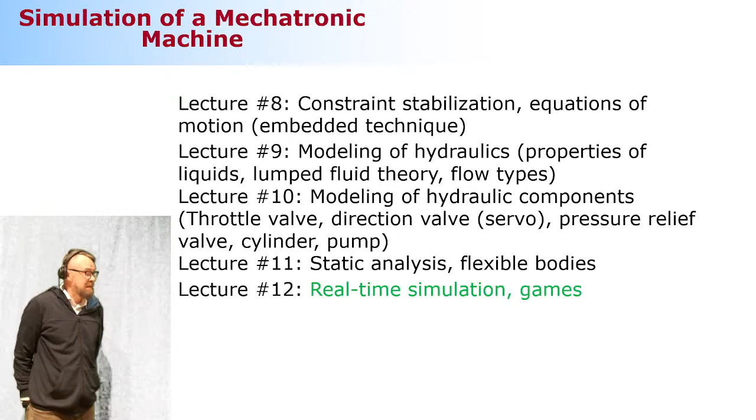All right, so with that, let's first look a little bit about what we discussed a week ago, and then I have a couple more slides about deformable bodies. I'm not planning to spend too much time on deformable bodies, but just short highlights about that subject matter, and we will get back to that.

I mean, those of you that will be assigned to this simulation laboratory course, we will discuss more about how we can combine different softwares together, like a finite element method software that is capable to model control schemes and so on and so forth. So that's going to be another course then.

But flexible bodies—remember that the need to model deformable bodies is because we would like to make more accurate models, a better representation of reality. And sometimes, particularly in hydraulically driven structures, they are somewhat slender and flexible structures. The flexibility is so significant that to make realistic predictions about reality, it needs to be accounted for. And there are several ways you can do it.

A week ago we discussed the method that is a very rough method, the lumped mass approach. There's actually an even simpler method than the lumped mass approach, and it has a really fancy name: it's called linear theory of elastodynamics. That is a method where we assume the body to be initially rigid.

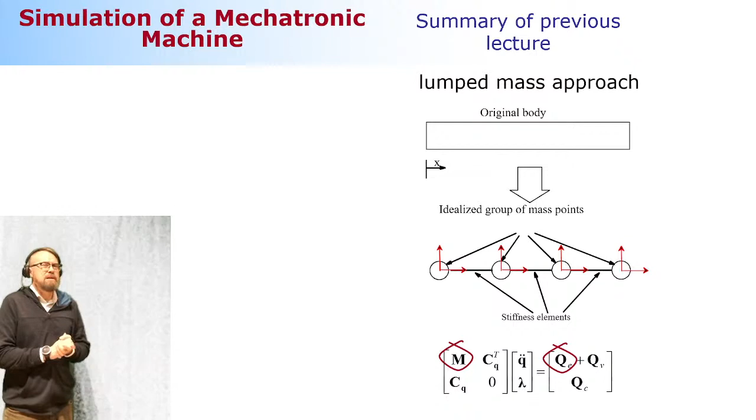And then we take a look at all the forces imposed on the body. Those forces are then used as a pre-processing or post-processing procedure to compute how much deformation those forces are capable of introducing. This deformation can be computed using a finite element approach, or just analytical equations that will be superimposed onto the rigid body motion. So that's a very coarse method and is not used heavily. At the moment it's not being used almost at all, because it's theoretically an incorrect way to do it, and that can lead to seriously incorrect responses.

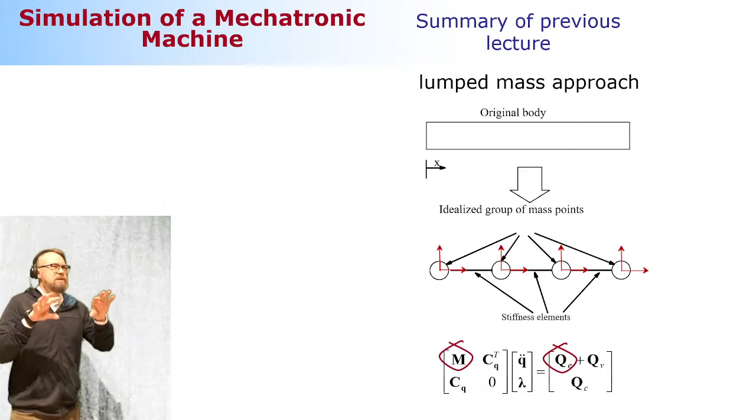So it's a risky business to use something like that. Anyways, the lumped mass approach is a simple approach where we take an original rigid body and divide it into a number of rigid bodies. What we do then is add spring elements between these rigid bodies such that there is a stiffness to each of the 6 degrees of freedom in the spatial case. And that's all that is needed, that's about it.

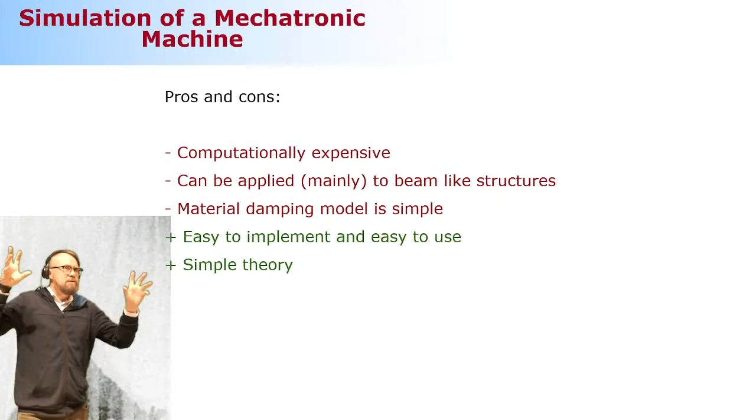Remember that situation where you have low frequencies and very high frequencies simultaneously. Integrators, the numerical time integration schemes, they can recognize the low frequencies, of course, but they recognize the high frequencies too, and they usually adapt themselves based on these high frequencies. And that slows down the computation very significantly.

And the method can be applied to beam-like structures. There are studies where this lumped mass approach is being used in plate-like structures too, but it becomes cumbersome to do so, not so straightforward anymore. And the material damping model is simple. I don't think that's a serious problem, but it's good to take into account. It's easy to implement, easy to use, because the theory is based on rigid bodies. And that's about it.

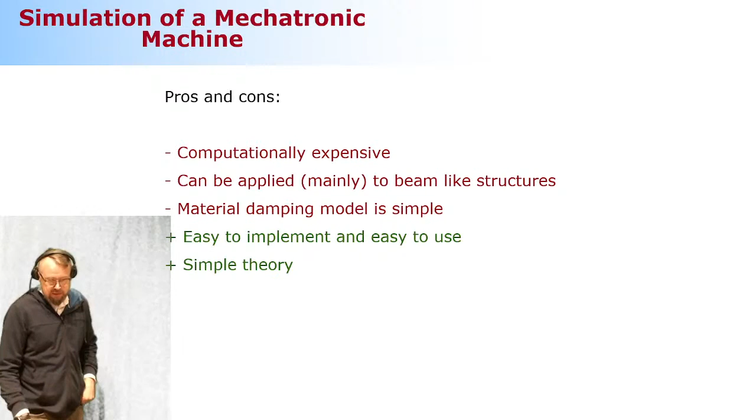Okay, then a short few words about the alternative, which is the currently dominating method to model flexibilities. It's a great method, but it's unable to describe very large deformation, because in this method the strain-displacement relationship, what we discussed a week ago, is assumed to be linear. In many cases that's okay, so it's not a big deal, but it's good to keep in mind that this is not capable of describing large deformation, like in the case of belts. It just cannot do it.

Okay, what is this method then? It is called the floating frame of reference formulation. Very lengthy, complicated name. What that means, essentially, is that we're going to use this body reference coordinate system you guys are familiar with, and we're going to introduce the finite element method with respect to this body reference coordinate system. That means the deformation computed based on the finite element method is not trying to describe the large translations and rotations that are already described by using this reference coordinate system, but small deformation with respect to the reference coordinate system. And this reference coordinate system is the one that is called the floating frame of reference.

The floating is a special case that every now and then you need to consider. It means that this reference coordinate system is traveling, translating and rotating, but it can be attached to the body in a way that is not attached the same way as in rigid bodies. Because in rigid bodies, there is no relative motion, whereas in flexible bodies there can be a little bit of relative motion due to the deformation. That's where the floating term is coming from.

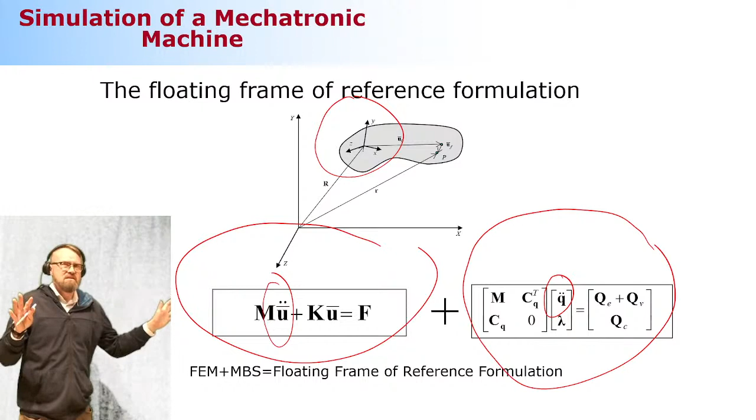There is, however, a big problem that we still need to address. The problem is such that if you think about the number of unknowns in multi-body system dynamics, in one spatial body we need 6 or 7 coordinates, let's say 6. Whereas in a finite element method, it's very common to see models that consist of 100,000 degrees of freedom, even 1 million degrees of freedom, meaning the number of nodes and nodal degrees of freedom is easily very high. So high that things are not matching well. Think about 100,000 versus 6. They are not in the same world, so they are not comparable.

So we need to do something to this finite element model. Something we can do for the finite element model is make it smaller. That's called modal reduction, or one way to do it is the modal reduction technique.

Let me just see what the comment is. So there's a complaint about my mic, that you don't see me or hear me well. Is it getting better? This is what I'm asking for online participants. Is it better? Okay, now better. Okay, very good. So I've got to keep it like this. Sound is okay, very good.

So I was about to say that we need to do something for that finite element model, and something we can do is reduce the size. This is a bit of a lengthy story and I'm going to cut corners, but basically what we do with this finite element model is take a look at the possible deformation, how the entire structure, this time the entire body, can deform. It can deform as many times as there are nodal degrees of freedom, meaning 100,000 times if you have that size of model.

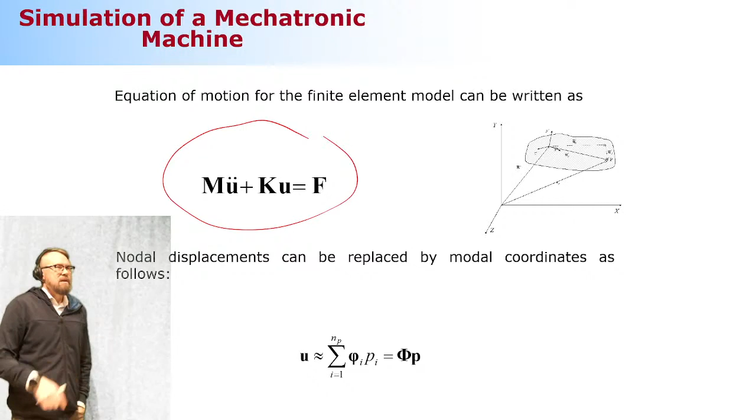And that's what makes it possible to use it as part of the multi-body system dynamics. So this is how it works then.

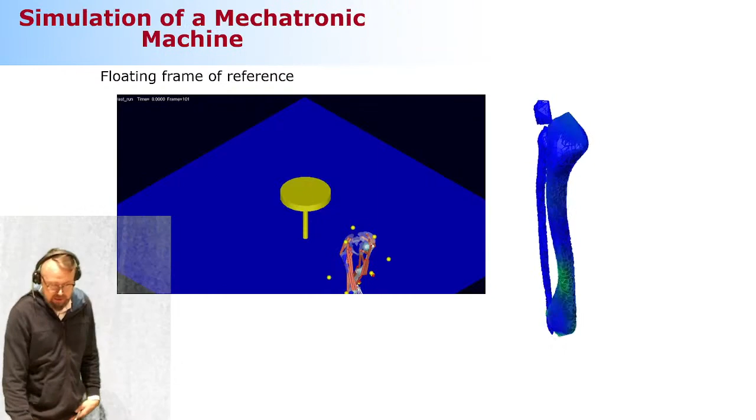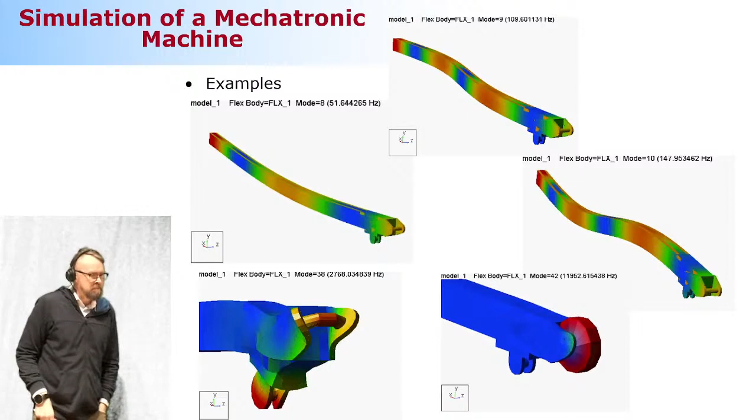Okay, so with that, I'm going to move on to real-time simulation and games, if there are no comments or questions.

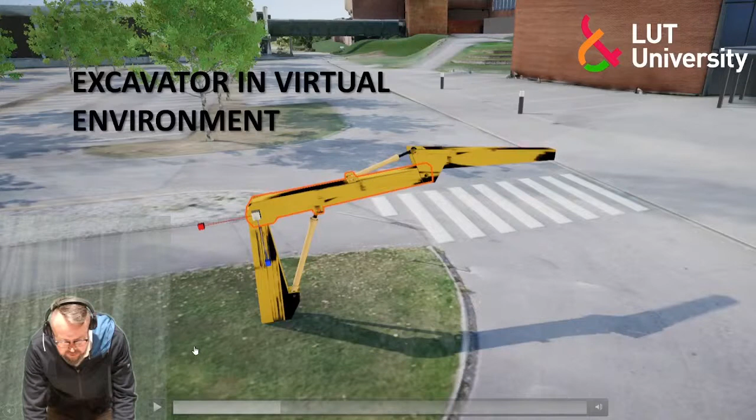The Laboratory of Computational Mechanics. No voice, where does the voice go? That is advancing real-time simulation for mobile. I guess it's going to the online participants. Okay, let me take it. Let me start this again. Oh, it should go here. Why isn't it doing that?

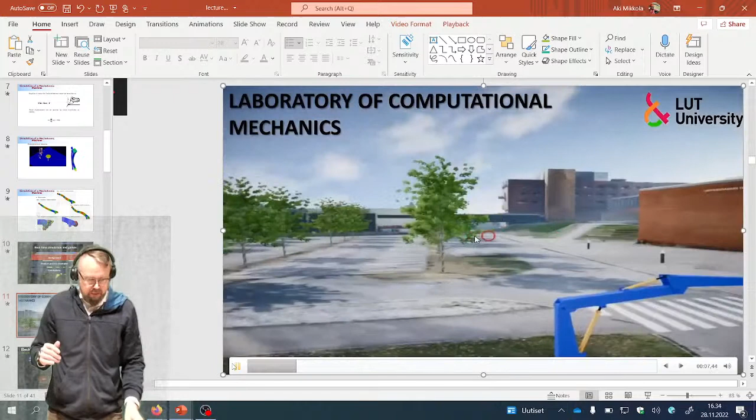The Laboratory of Computational Mechanics is a mechanical engineering research group at LUT University that is advancing real-time simulation for mobile working machinery. You can see a particularly important focus of the work.

Okay, let me try this one more time. Maybe I can play this video for you because... no, not that, not that. No, you don't see that yet, but you will see it momentarily. No, it comes without the voice. So this was...

Introducing a little bit of the research we do in the Laboratory of Computational Mechanics. By the way, our official name is not computational mechanics, but machine design. And machine design implies that we do some kind of artistic work as a team, which we don't, because of a language conflict between Finnish and English. So we don't really do any artistic things. Look at me, and it becomes clear pretty quickly that I have no talent in that direction.

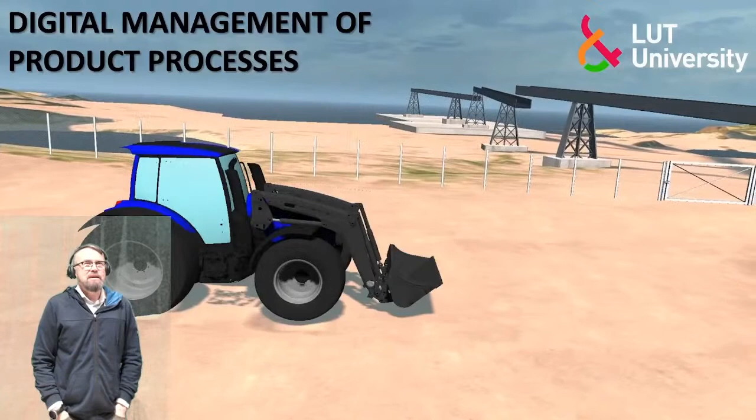But what we do instead is... and you don't even see that, you don't see it at all. Okay, what happened then? So it was displaying something to you, but what was it? Okay, let me do it one more time. Oh, it was extending the screen.

The Laboratory of Computational Mechanics is a mechanical engineering research group at LUT University that is advancing real-time simulation for mobile working machinery. Development of better digital twins, which are virtual representations of machine systems, is an important aspect.

I got a warning message on my YouTube saying the connection is poor. Very big disappointment, because there was a big surprise for you at the end of class, and maybe now I need to skip that big surprise. Okay, we'll see.

This is just showing the research activities we do and the different real-time simulation models we work with. Real-time simulation, generally speaking, is exactly what you learned in this class. The only difference is that the solution is synchronized to actual time. That means you need a computer implementation that ensures all computation can be carried out within a certain time limit. Once you can do that, you can synchronize your simulation to real time.

And that's a little bit of an example of what games are and what they're capable of doing. Sorry that this video is not available, and I also got this connection problem message in my YouTube studio, so hopefully it's not too severe. But anyway, that was a short introduction about real time, and this is showing thematically what it means.

In a real-time simulation, we make representations of mechanical components based on multi-body system dynamics. We also represent actuators, very often hydraulic actuators, but they could be something else too. Then a control system is somehow involved, along with the working process. And then we take a user as a real person.

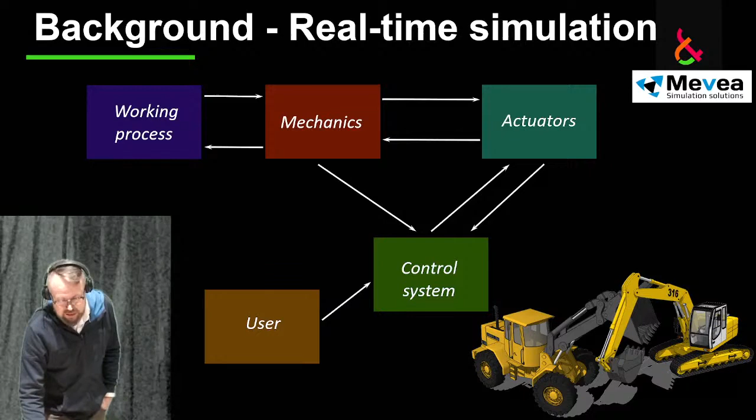So that's the big picture, that's how it works. And here's another animation - I'm pretty sure the voice is not on, let me just make sure the voice is completely off.

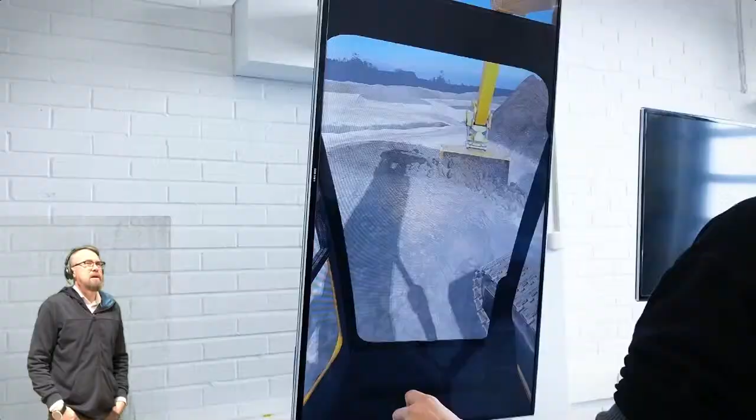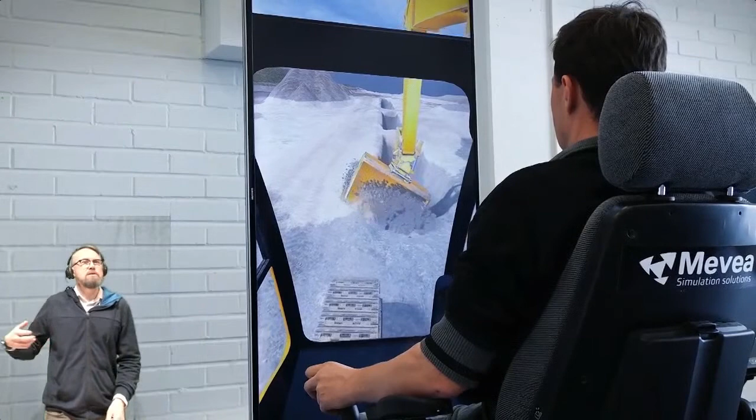Real-time simulation can be something shown here - it could be a representation of an entire excavator, meaning mechanical components are described, hydraulics is described, contact between the ground and the bucket, contact between different bodies of the excavator is described. The ground can also be deformable, such that you can take a piece of dirt and move it from one location to another. Everything here, this mechanical modeling, also partly the modeling of deformable ground, is based on multi-body system dynamics.

And you know that the modeling of hydraulics is based on lumped fluid theory. So you have knowledge about each of these details needed to build this kind of model. It's not overly complicated for you guys.

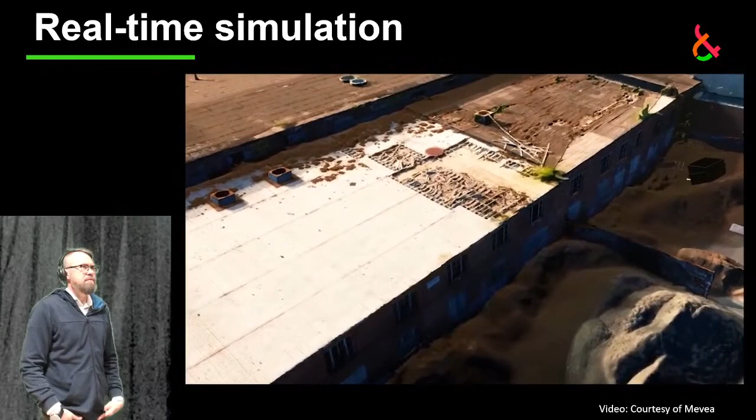Here's one video which shows how this looks when we put it in a Unity environment. Unity - those of you into game technology know there are two platforms heavily used to build games, Unity and Unreal Engine. So what we do is we use Unity, and Unreal Engine too, but not so much. We make some trials to use Unreal Engine to visualize the engine.

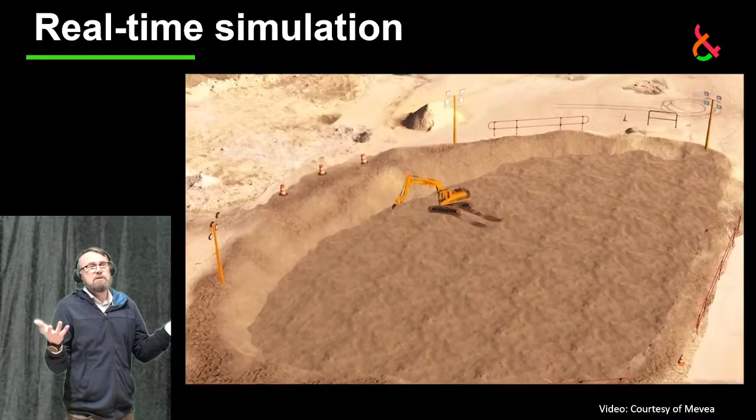The engine itself is based on multi-body system dynamics technology, which is used to solve the physics-based performance, the physics-based behavior.

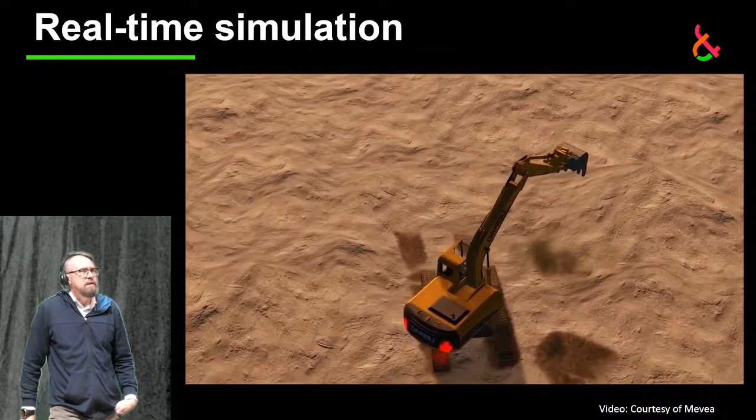You know there's something called a game engine, and they too are becoming more realistic all the time. Some game engines are fairly close to reality, but they still lack certain features we need, like description of hydraulics. Sometimes the contact description isn't accurate enough for what we want, and sometimes we want to describe mechanical deformation in the bodies - that too is missing in a game engine. But generally speaking, game engines are becoming better and better all the time.

Some of them are free to use - there are open source game engines that are already very good, very much advanced. Okay, so that's about that thing.

Now what I would like to do is give you highlights about where this real-time simulation can be used in different product processes. I'm not going to explain all the possibilities it can be used for, but I'm going to just give you a few highlights.

Is it so, by the way, that each of you participated in the course organized by Tuhin? Each of you - so you know the story already, because what I'm about to tell is more or less what I mentioned in Tuhin's course about, what is it, mechanical engineering something. So you guys are aware of this, or more or less aware of this.

Okay, let me give you highlights and then we can discuss. This for sure will not happen, but let me have a dream in my mind. Okay? How is everything so far, by the way?

Is everything clear? Any comments about how to model flexible bodies? Any comments about real-time simulation? It's all clear. Yes, yes, sir.

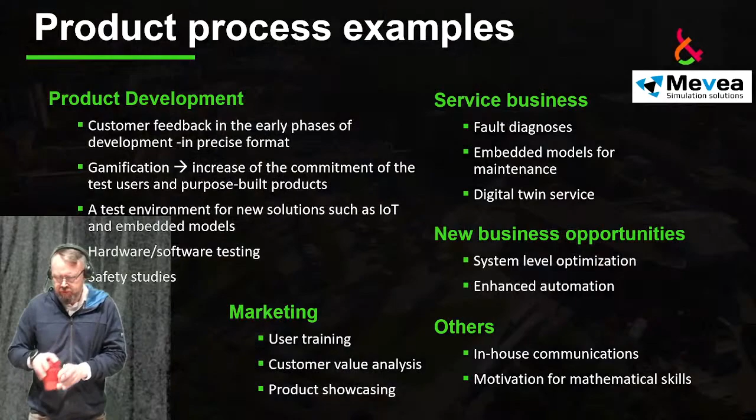Okay, so the question is like how close this is to reality. That's a very good question.

To answer that, I need to take you back in history, to the time when I was young. You can imagine how that was, so it was quite a while ago.

At that time, there was very heavy skepticism and criticism against dynamic simulation. Many people claimed that what you can get out of simulation is not according to reality, that there must be major differences between reality and the simulation model. At that time, it was very common that each simulation model was verified against measurements.

So the case was that you built a simulation model of, let's say, a hydraulically driven crane or excavator, then you went to the real machine and instrumented it with different kinds of sensors - pressure sensors, position sensors, velocity sensors, and so on, maybe strain gauges as well. Then you operated the crane, and also recorded the signals that went to the direction valves. You took these signals as they were, put them into the simulation model, and looked at how far they were from each other.

And people don't do that anymore. Because after doing that for a while, it became clear that if there was a difference between the measured signal and the simulation model, most often the guilty party was not the simulation model, but incorrectly made measurements. So they don't do that so often anymore.

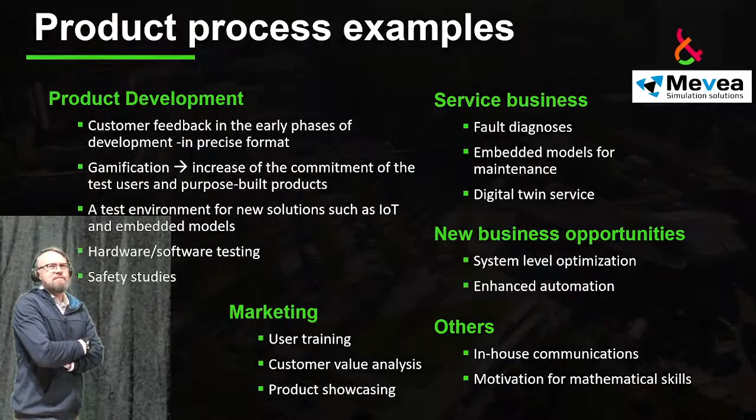A couple of years ago, maybe 5 or 10 years back, the same kind of criticism was against real-time simulation. Same story again - how can it be accurate because you're computing everything in real time? So there must be some wrongdoing there. And again, they were verified using measurements, and again they were accurate. After doing this for a while, what was left aside was the measurement.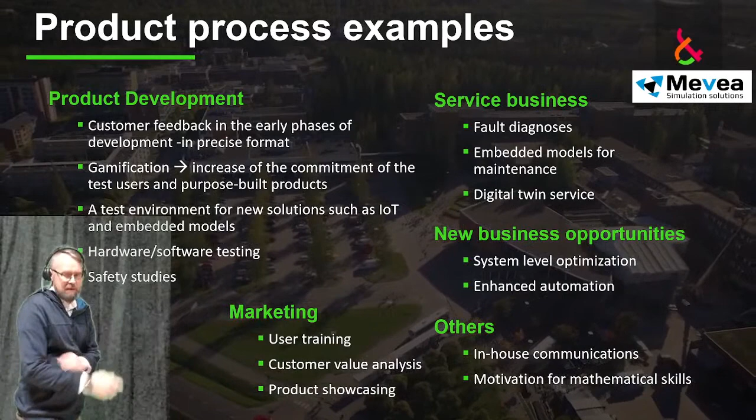Okay, so as this is all clear to you, I'm going to browse over it - not looking at the details, just showing you the big picture.

Real-time simulation models are accurate representations of reality, so they can be used in product development to build a better understanding of what the customers want and what their needs are. This is like traditional product development, but with the possibility to get immediate feedback from the customers, which is a great benefit because otherwise you need to build the machine to do it.

The world is full of examples where engineers made real products and the customers hated them - a lot. That's simply because there were no opportunities to get feedback early enough. Some cars, people don't like them, they may be unreliable and so on, and that's because companies didn't have a mechanism to get feedback early enough.

So you can do that by using these real-time simulation models, and you can build a bridge between product development and the customer. That's what you learned from my previous presentation.

We've ingested that into a game environment where you can modify the model, like you can modify a model in a game. So you can tune your rally car, make it better. The same way you can tune the excavator, selecting different hydraulic features and seeing whether or not this is something you like.

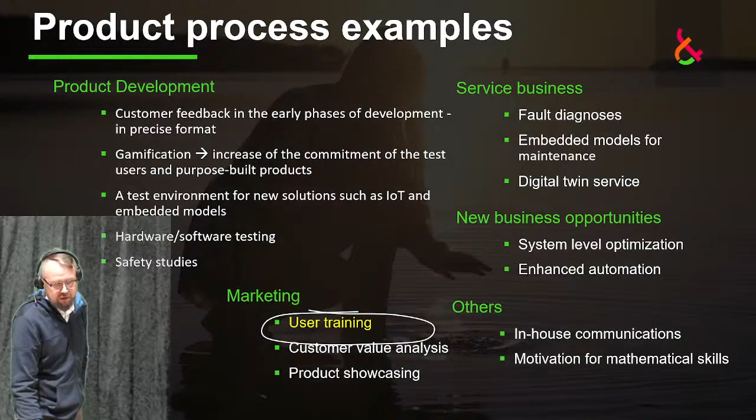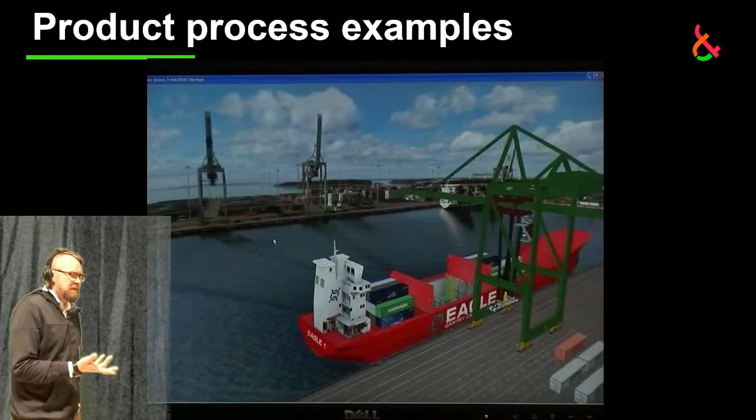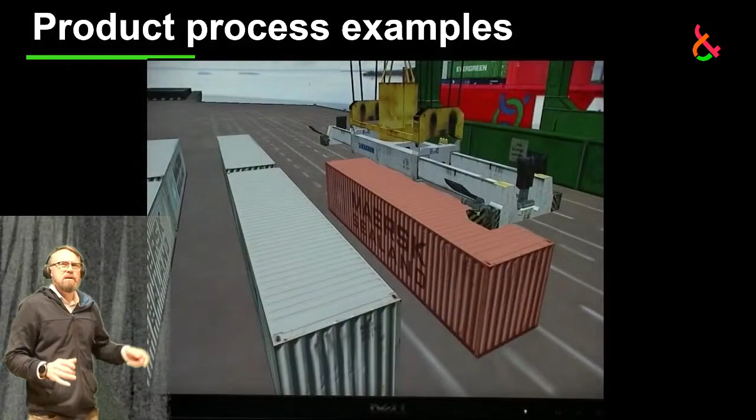User training is a special feature or special case in real-time simulation, because you do not need that accurate physics. Sometimes kinematics is enough, because you want to learn how different joystick operations will move your machine. So you don't need that accurate dynamics for user training, but kinematics often will do it.

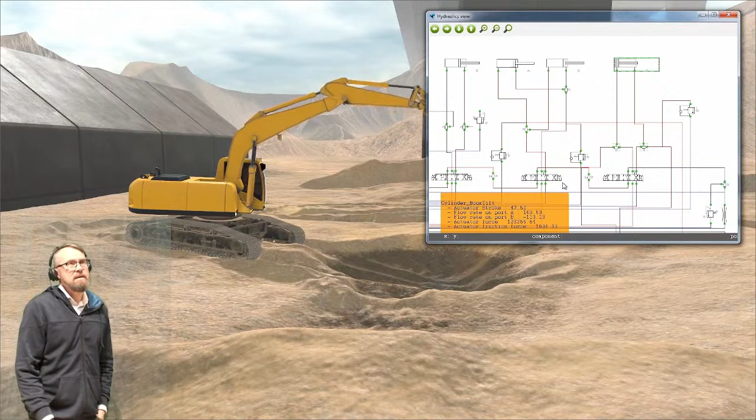Fault diagnosis - you can build different kinds of failure maps, so what happens if there's a failure of different kinds, and how the machine behaves in a case like that. That's possible with a real-time simulation model.

It is possible to do something that Suraj is doing at the moment, called reality-driven simulation. This fixes a problem you always have with a simulation model: reality and simulation can never be a one-to-one match. Minor differences accumulate as you simulate, and these accumulated errors make the difference between reality and the simulation model bigger and bigger until the two have nothing to do with each other anymore.

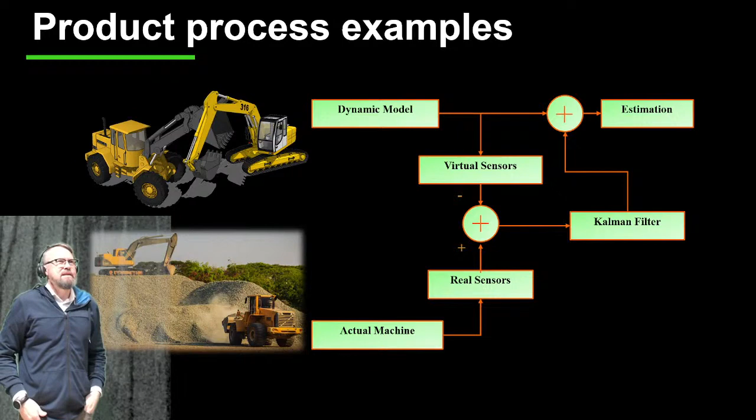In reality-driven simulation, you force your simulation to follow the measured signal coming from the real machine. Why? Because then we can get an estimation about the forces, the loads, and so on. We can even get an estimation about the strains and stresses within the structure, even when we are not directly measuring, but computationally estimating. That's how it goes.

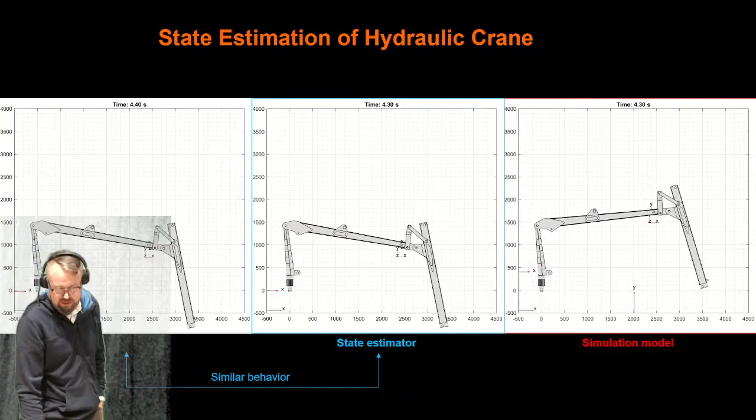This is an example of how it works. We have a real machine, and there's a simulation model that is synchronized with the real machine, so they behave accordingly. Then we can dive into the machine and measure, or estimate, the quantities that are not directly measured.

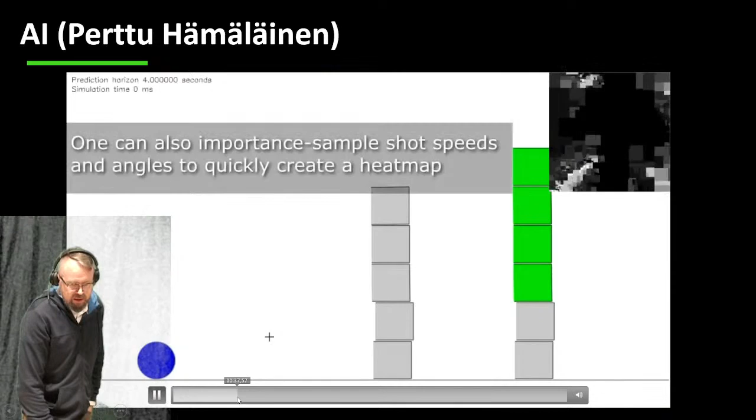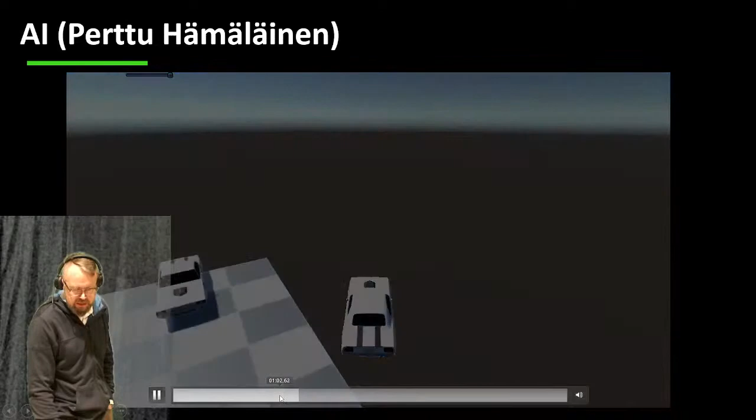This system-level optimization is going to be my second-to-last example. This technique lets you compute faster than real time. When you compute faster than real time, you have an ability to see what happens in the future, and when you can see the future, you can tune your motions and actions to get something that would otherwise be too difficult to achieve. This is my favorite example: driving a car.

This car is driving across heavy traffic, and it's not very good, not very successful. Whereas when you have the ability to see what happens in the future... sorry, I cut this in an incorrect place. I think it's this place. Sorry, we need to take a look at this again.

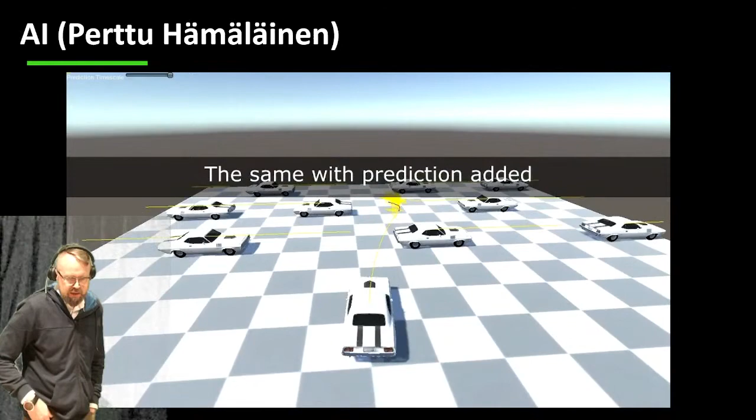This is a prediction. It sees the different consequences, and because of this ability to see what happens in the future, you can adapt your motion accordingly. This is a pendulum kept in an upright position using this technique—you see what could happen next, and you tune your system based on that information.

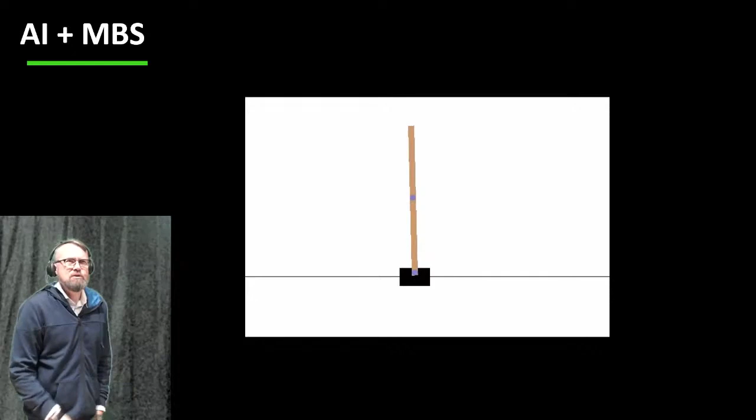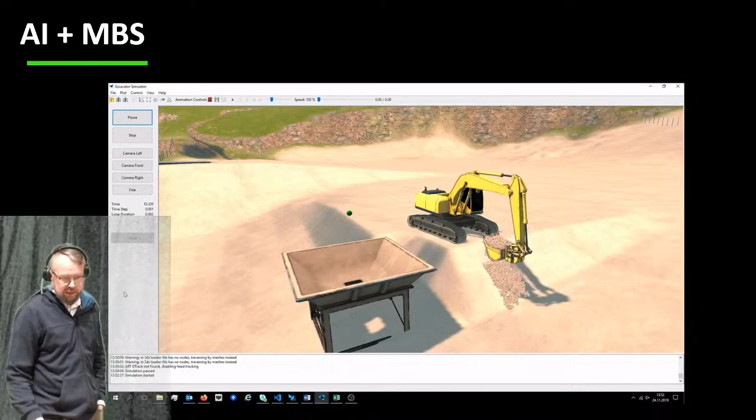This is an excavator that we use reinforcement learning to teach how to operate. It needs an awful lot of teaching—it's not very clever and needs a lot of data. How much data? A good example is this pendulum with four bodies kept in upright position, teaching the control scheme how to behave. This required one billion analyses. That's a lot of analysis.

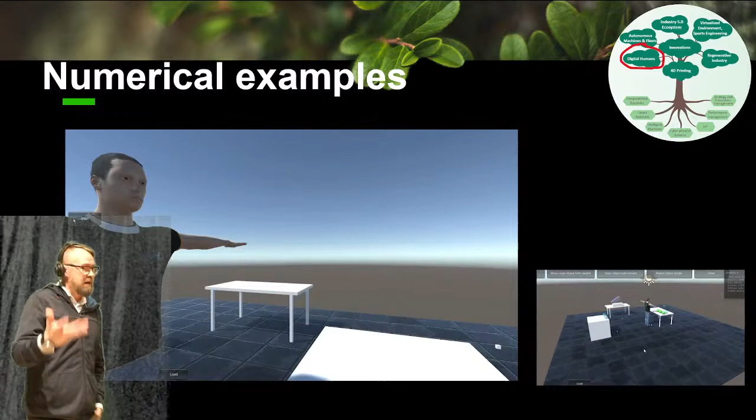All right, so with that we're going to close this case—I don't want to go this direction, I want to go here: safety studies. We also have biomechanical models we can use in different scenarios. We can have a human climb stairs and see if it's too risky, or if there's a possibility of hitting the head or something. That's all we can do.

So that is a highlight of the work we do in the Laboratory of Computational Dynamics, which in Finnish is the Laboratory of Machine Design. But we don't do design—we don't do artistic things. We do product development, but no artistic aspects.

Okay, so I have another set of slides, which is a summary, and then we're going to close.

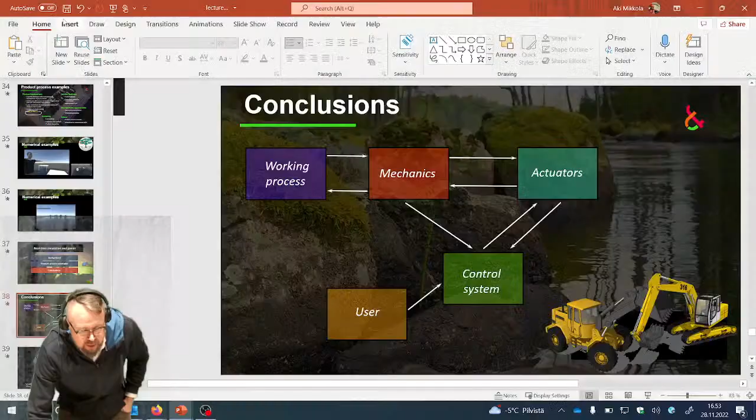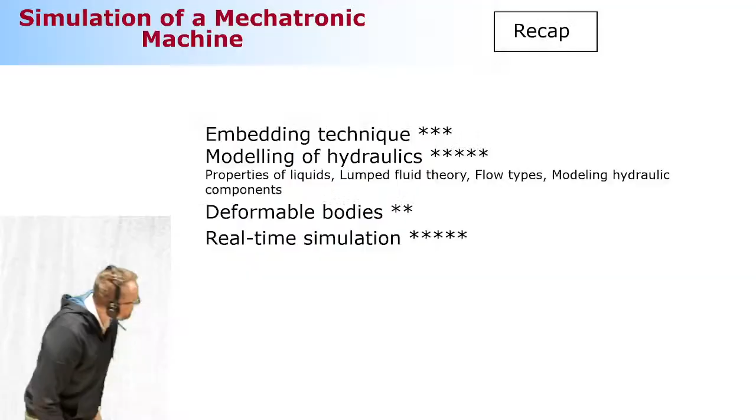How does that sound? Sounds good. Okay, I got no comments from online participants, so just a second, I'm going to take these away and change my presentation to this one. And of course, you don't see it yet, but you will see it momentarily. Okay, I lost the picture here. Oh, here it is, okay.

So only four different things. I'm expecting you to know a little bit about this embedding technique where constraints are substituted inside of the equation of motion. This is not a very important topic—it's ranked as medium importance.

Medium importance. Then really the main body of the second midterm exam is about hydraulics—how to model the hydraulics. You'll see that each of the items, well, not each of the items, but the big picture of the hydraulics is ranked as five stars.

So that's as many stars as you can get, so it cannot get any higher than that. That's extremely important subject matter. Deformable bodies, not so important because it's only 2 stars, so if you are in a hurry, skip it.

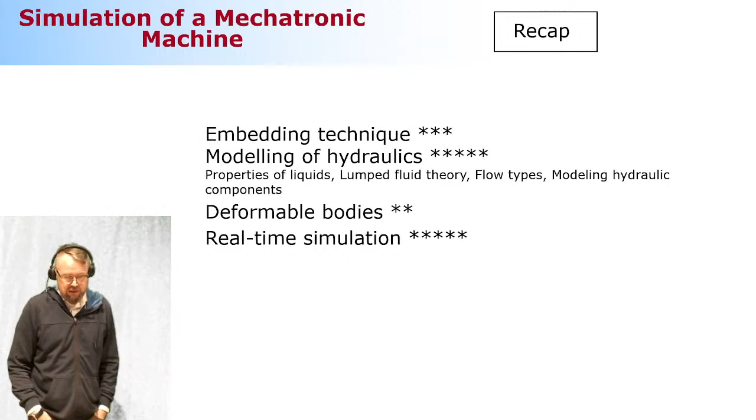This real-time simulation, the different processes is ranked 5 stars, but it's based on common sense, so I don't think you need to invest that much in that final topic. But the one that is extremely important is, again, hydraulics. Hydraulics can be broken down into matters listed here: properties of fluids, lumped fluid theory, flow types, modeling of hydraulic components. Each of these subcategories are ranked as well. How are they ranked? You're going to learn momentarily. So that's the situation where we are. Remember this, it's extremely important to keep in mind.

I know that some of you, based on the participation in these guided tutorials, are planning to skip the simulation work. I don't know if that's really the case, but you can do that. That's okay, that's not a big problem.

But make sure that whatever your plan is, you will score at least 35%. And if you see that things are going south, not going the way you planned, let me and Suresh know in advance. If you're facing serious difficulties, let us know in advance. Once there is a deadline about the simulation work and you get back to us after the deadline, there is absolutely nothing we can do for you.

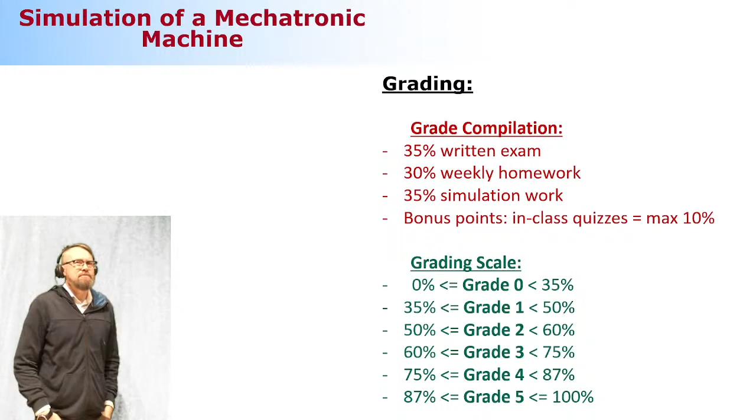We just cannot help, because this would become a never-ending story if we said you can get back to us whenever you want. Then somebody would come back to us in the summertime and say, hey, now I'm ready to do my simulation assignment. That would be too much work for us. We'd like to follow something called the minimum energy principle, a well-known principle in mechanics, so we want to follow that in our teaching too.

Okay, so keep this in mind. And in-class quizzes, Mustafa just mentioned to me that I haven't emailed some of the results to him, and he is the one collecting them. We'll do that today, so you'll see how well you're scoring on the in-class quizzes. That information will be available, let's say, within this week.

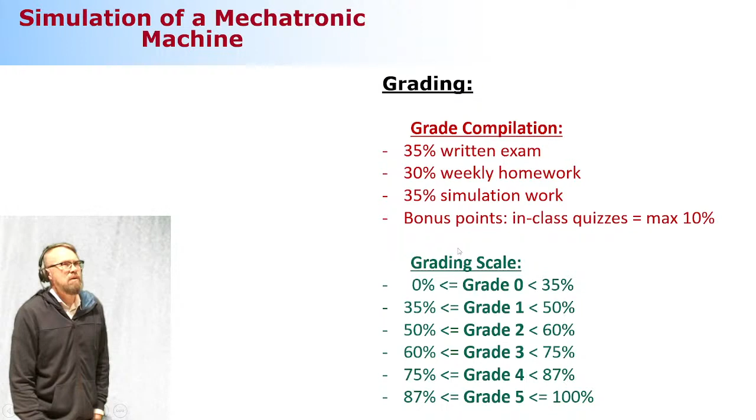So then you know. The written exam and in-class quizzes, in the best possible scenario, take you this plus this, which is going to be 45%. Unfortunately, the grade will still be 1, but you pass. You can put this behind you and forget about the whole class, so you don't need to worry about that anymore. And then, midterm exams.

As I mentioned, week 51 is not a good week, that's Christmas week, and no one wants to work in Christmas week, or let's say at the end of Christmas week when there's New Year, Christmas Eve. It's not a good idea to work then. So what I'm proposing is that we'll have an exam open for 2 weeks' time, 2 attempts, highest will be accounted, exactly the same as the first midterm exam.

The weeks that it is open are the 49th and 50th. The 49th is Monday, December 5th, that's when the exam will be open. It will be closed on... I need to check that from the calendar. So it will be open on Monday, December 5th, at 00:01, and it will be closed on December 18th, which is a Sunday, at midnight—I guess a couple minutes, 1 minute before midnight. So 2 weeks' time, 2 attempts, highest will be accounted.

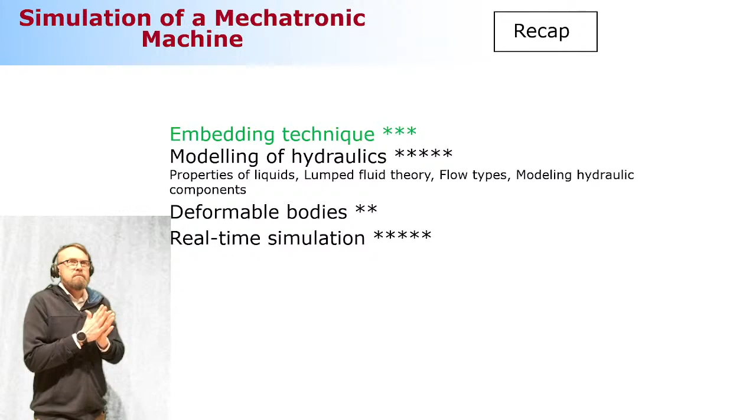Everything is clear. Okay, embedding technique. Remember, this is about getting a minimum number of variables to create your equation of motion. So it was based on this observation.

When you use the concept of virtual work, in general you cannot set this equation equal to zero, because virtual displacement might violate the constraint. So what you want to do is express this virtual displacement in a way that does not violate the constraint.

How can you make this happen? You can do it by categorizing your general coordinates into independent generalized coordinates and dependent generalized coordinates. Generally speaking, you can do as you want, but in real computing, it's based on Gaussian elimination with full pivoting.

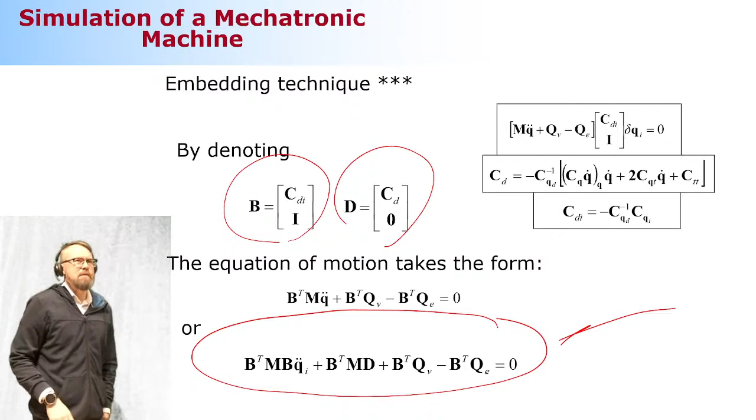There are certain notations you need to use. Once you have this, you get an equation of motion which offers an equal amount of differential equations as the number of degrees of freedom. Memorize this - that's important to remember. Okay, so that's about the embedding technique.

Hydraulics. In hydraulics we have four different subcategories: properties of fluids, lumped fluid theory, flow types, and modeling of components.

Fluid properties - two things that are important, one very important and one less important. The very important one is bulk modulus. Bulk modulus is kind of the same as the elastic modulus used in strength of materials - it defines how flexible your hydraulics is.

There is something called effective bulk modulus that takes everything accounting for flexibility into account - that includes fluid and dissolved air, how much air is involved in your system. Hard to know in real life, but you can make an estimate.

Flexibility of components - hose is the one that can lower the effective bulk modulus fairly significantly. So if you want your hydraulics to perform better, reduce the hose lines, use steel pipes instead of hose lines. That could be one solution.

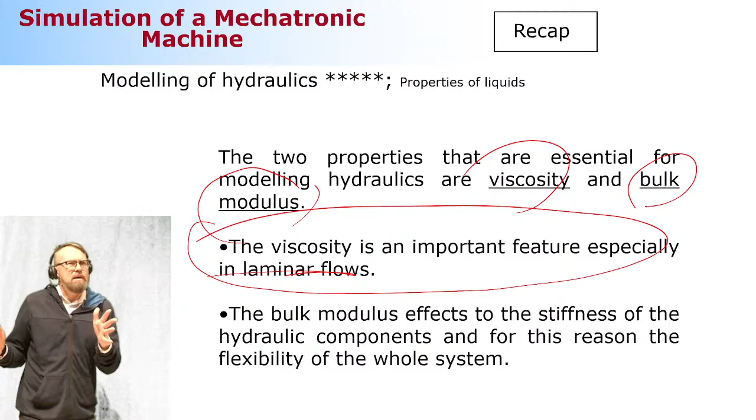Here's more information about effective bulk modulus and how you can derive that. That's something very important to keep in mind. I would say for sure the question bank will have each of you select a question related to bulk modulus and how it can be used.

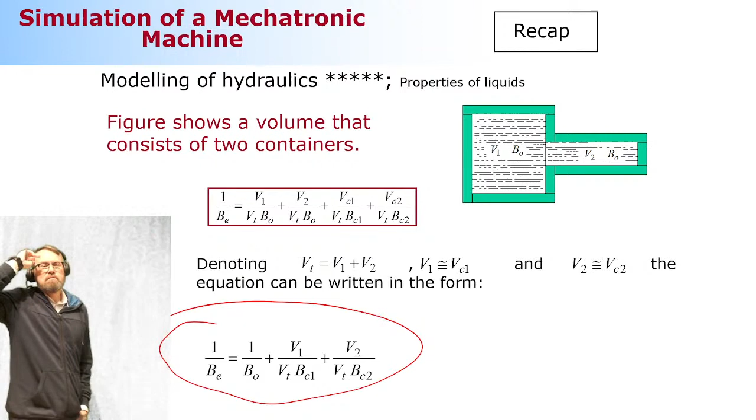There's nothing that you need to compute, but you need to understand the concepts. It's all about multiple choices, and you need to select the one you feel is correct.

Lumped fluid theory is the foundation of hydraulic modeling. This is the way we can compute pressures as a function of time. We discretize our hydraulic circuit into volumes where pressure is assumed to be equally distributed. Once we have this discretized hydraulic circuit, each piece can be computed using a first order differential equation. The flow that travels between these different volumes tries to equalize the pressure difference. That's how the hydraulics performs.

Here is your first order differential equation. Look at the components: the first one is the effective bulk modulus, volume size, flow rate in, flow rate out, and the component that describes the change of the volume.

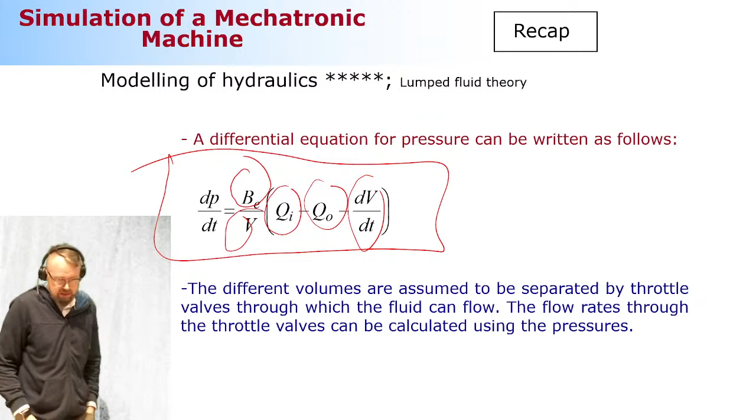That's the first order differential equation, very important, ranked 5 stars. Flow types: there are 2 different flow types, laminar flow and turbulent flow. In laminar flow, flow rate and pressure difference are linearly related, whereas in turbulent flow they are quadratically related. That's good to keep in mind.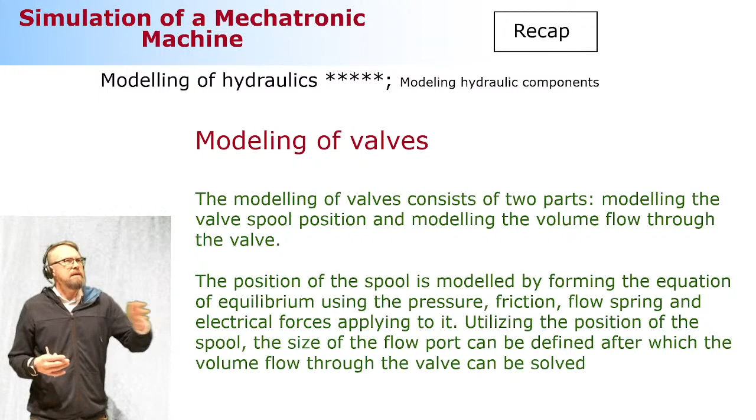Modeling of valves and other components. Valve modeling has 2 steps: first to model the moving component, if there is one, to know where the moving component is at any given time, and then the flow rate through the component. A simple valve, like a throttle valve, has no moving component, so you don't need to worry about something moving there.

We use a method called the semi-empirical modeling approach. It has components from the analytical approach and components from measurements. We start from analytical expressions and manipulate them so that unknown parameters can be obtained from measurements carried out by manufacturers. You don't need to carry out the measurements because somebody did that already. You just need to find those unknown parameters from the measurements that are already available.

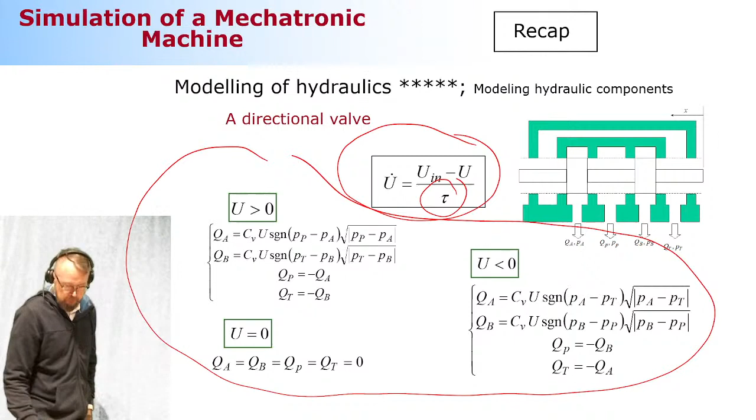Then the direction valve, again 2 steps. First, spool position. Very often there is a question about what this delay equation is representing - that's the spool position, and this is a time constant, describing how fast the spool can move from one location to another. Once you know the spool position, you can model the flow rate through your component.

Then the pump - you learn to model fixed volume pump and variable volume pump. We also discussed modeling of cylinder. In a cylinder, the only problematic thing is related to friction, how to describe it. Remember, there is stick-slip friction you see quite often - that's something that takes place in a hydraulic cylinder as well.

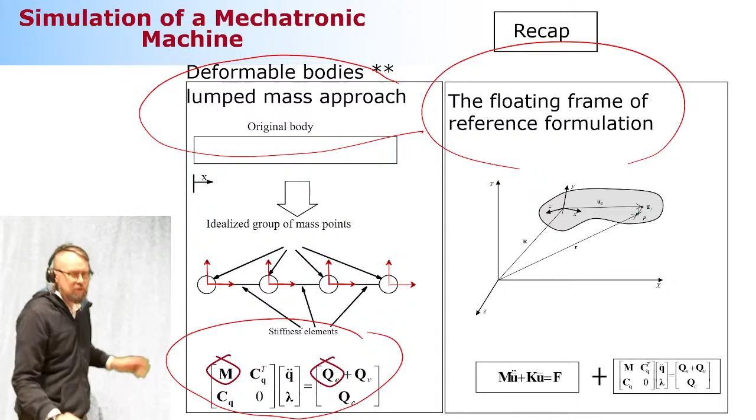Deformable bodies - there were two methods, the lumped mass approach and the floating frame of reference formulation, conceptually very different, because the lumped mass approach uses theory based on rigid bodies, whereas the floating frame of reference formulation changes the kinematics. Because you're changing the kinematics, everything needs to be changed accordingly.

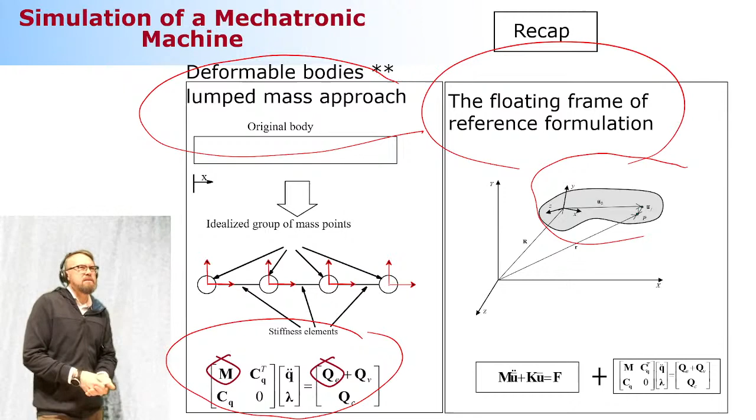Let me see if I have any more slides. Then there's real-time simulation - different production processes where real-time simulation can be used. Common sense, more or less.

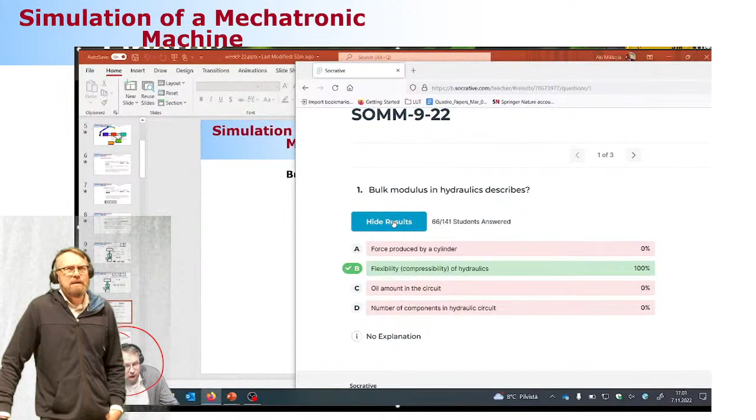I don't think that's common at all. There was some visiting lecture I delivered a while ago where people scored 100%, but last year it wasn't the case. That never happened, and I couldn't believe my eyes, because the question I asked wasn't even easy. Remember there have been easy cases like identifying what a symbol equation represents, with options about rotational particles and other nonsense, and you guys never scored 100%. So it was a big surprise.

I made a promise that if you guys score 100%, I will be happy, and I will do something unusual, which I never do because I'm a stiff, not an artistic guy. So here's my promise.

So what do you think is going to happen? I don't even know myself.

This happened just before COVID. I made a visit to Korea - that's me. This story is a long one. I was having dinner with my friend Professor Choi, and after dinner there was this place in some kind of complex, a restaurant and a big theater. After dinner we went to see a traditional Korean performance.

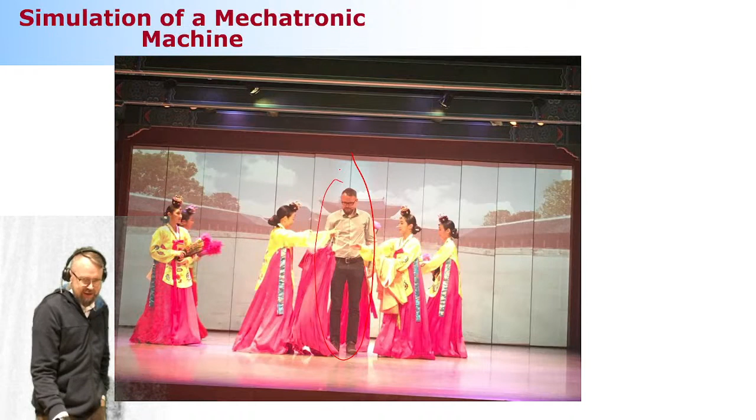I walked with them to the podium - this is me, of course, and these ladies are a little bit shorter than I am, and they're beautiful ladies, so when comparing them against me, the difference is enormous, so you can easily recognize me. Then they started to put this costume on me, and it's a dress, and it's getting even worse than that.

The music is not on. Okay, so guess who is me? I can tell you, I'm in the middle. I'm sure you didn't recognize me, but I'm the one in the middle, and it continues here - this is the same.

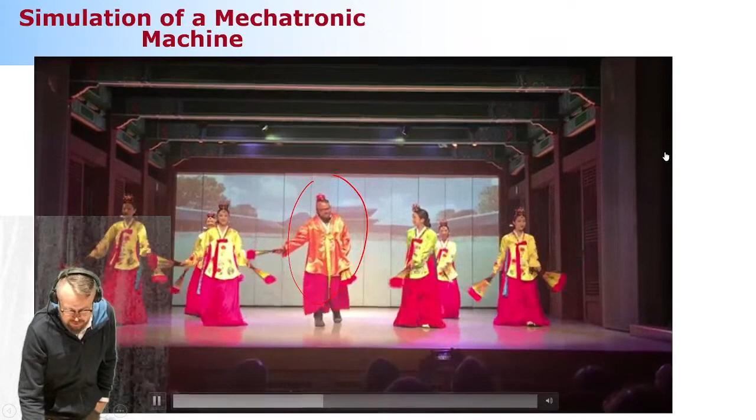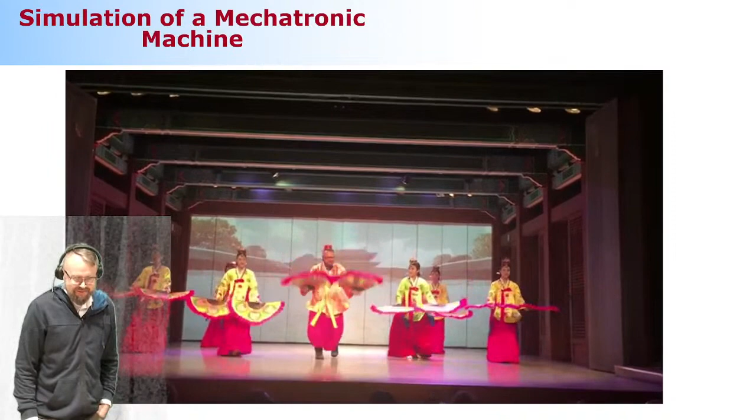Oh, look at this. So now you don't know. And one more thing - this is what we saw already. Okay, one more.

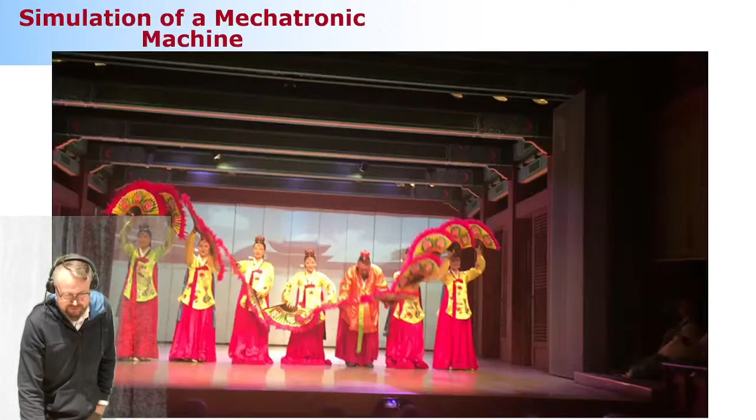One thing you don't hear all the time is that my family and my friend were laughing so loud it was hard to even hear the music, because they had so much fun. So that's about it. Thank you very much.